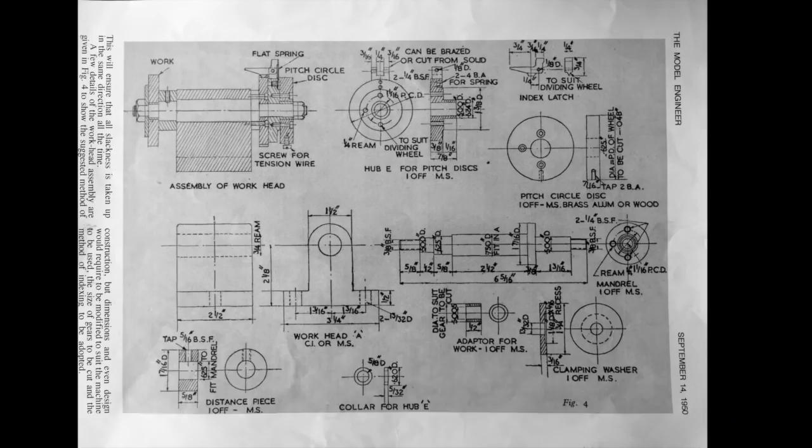After a lot of requests, I have put together this video with all of the various calculations, drawings and design elements of the gear cutting on the Shaper project. Here we see the first component of the mandrel block, parts and materials being sourced, marked up and prepared for the first cut on the Shaper.

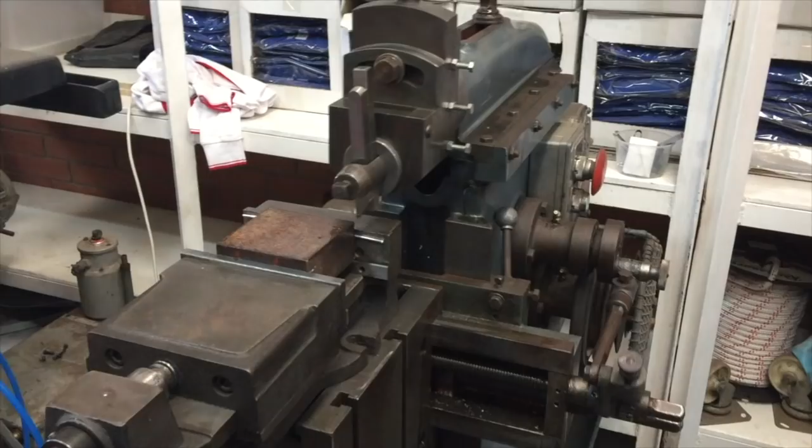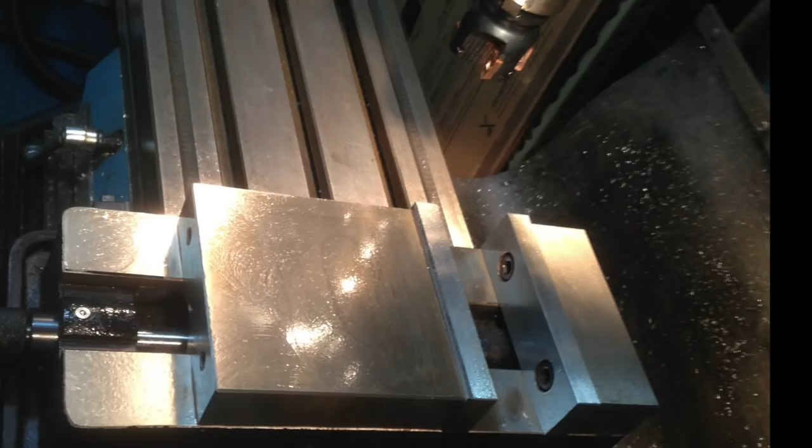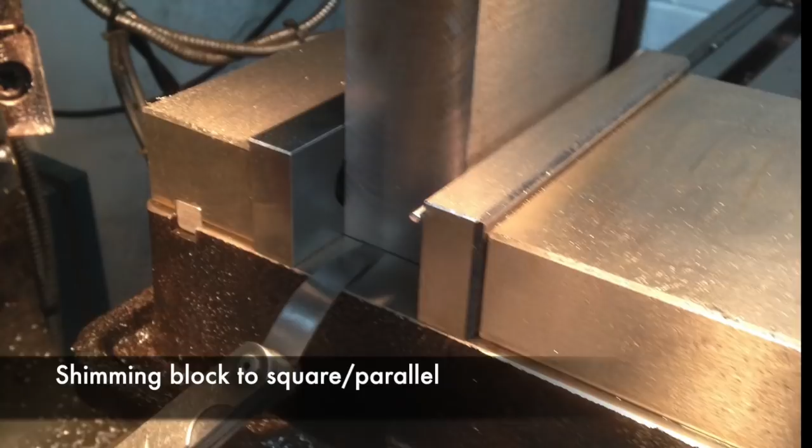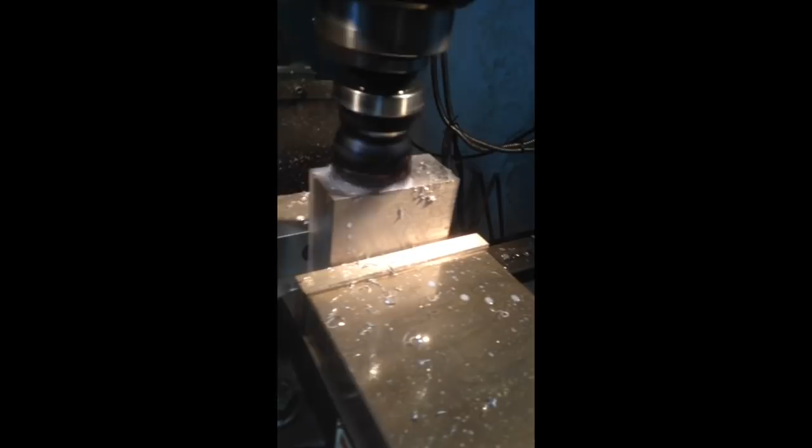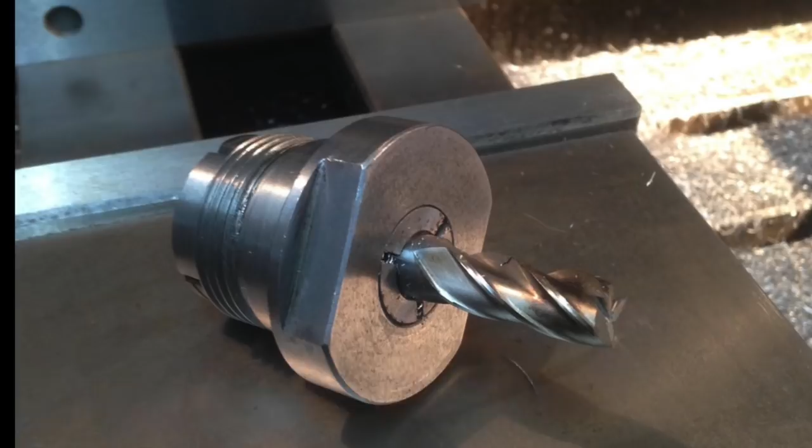Once the block was squared up, we then took it to the mill to do some finishing to size, final bits of squaring off and preparing to bore the hole for the mandrel in this block. The base plate was prepared and squared up using a smaller end mill in the Clarkson collet chuck.

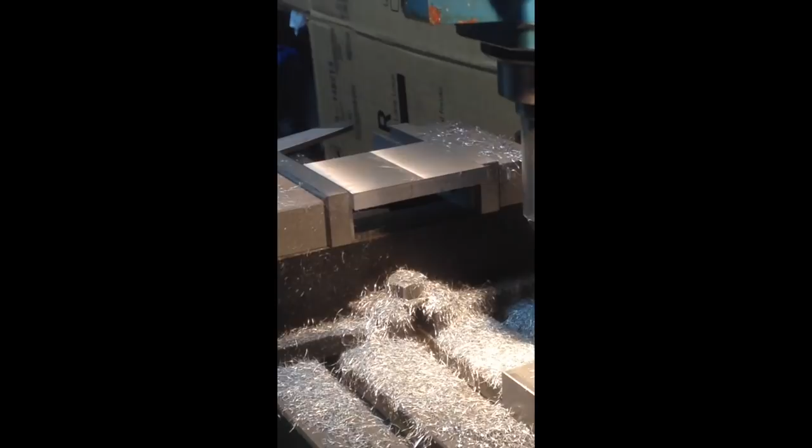Final cut for the last finish. Is it still down to it? I'm just trying to file on that very quickly. File on that. That is that. Okay.

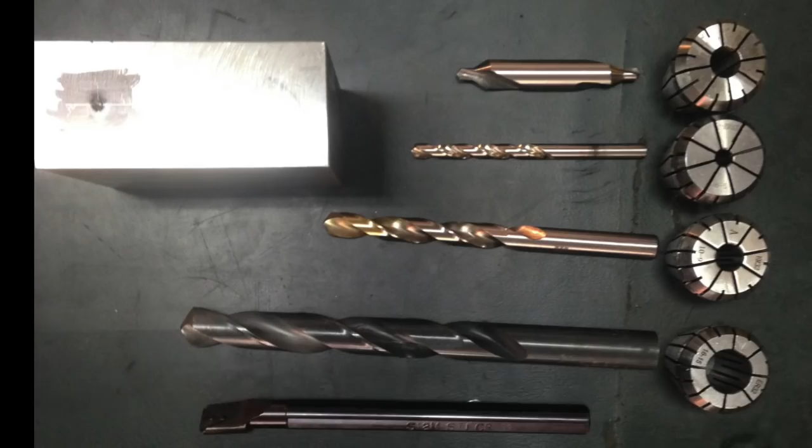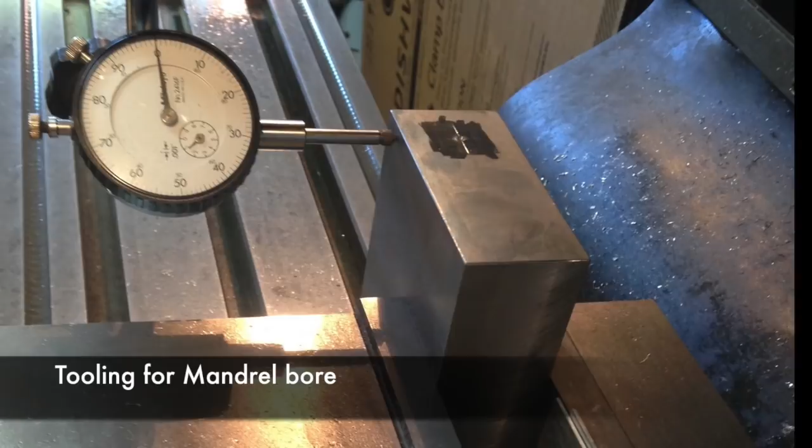What you see here is the solid base and mounting plate, and moving on to the tooling that we prepared to bore the mandrel block. This is used in a number of steps, from smaller drilling through to the larger drilling and the various boring operations to get us to a very tight fit. We want this spindle, the mandrel, to be really held tightly on this block because the shaper has quite a bit of force behind it, hence the need for high precision and good accuracy.

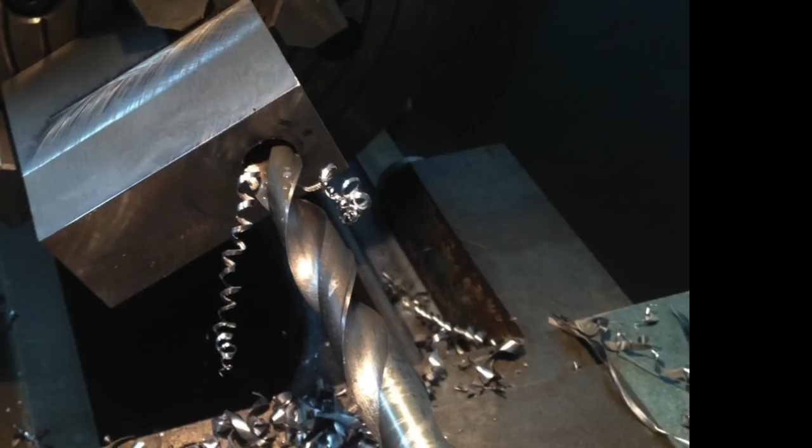Pilot hole is drilled. We now expand to the largest drill size we've got and prepare for boring with the boring bar. Once the boring is finished, we then finish it out with the reamer to an accurate fit.

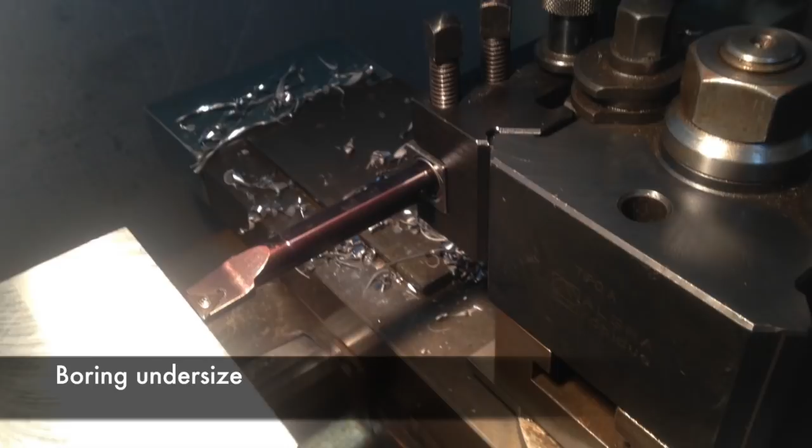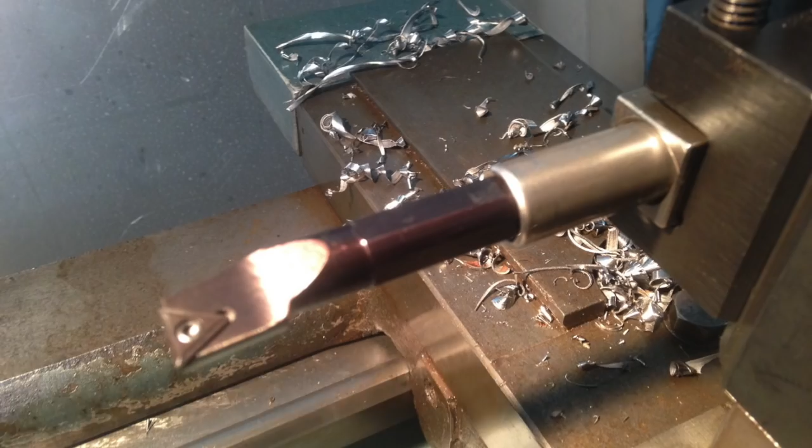Here you can see the extended strongback on the boring tool. This just helps to add some rigidity as we plunge deeper inside the mandrel block.

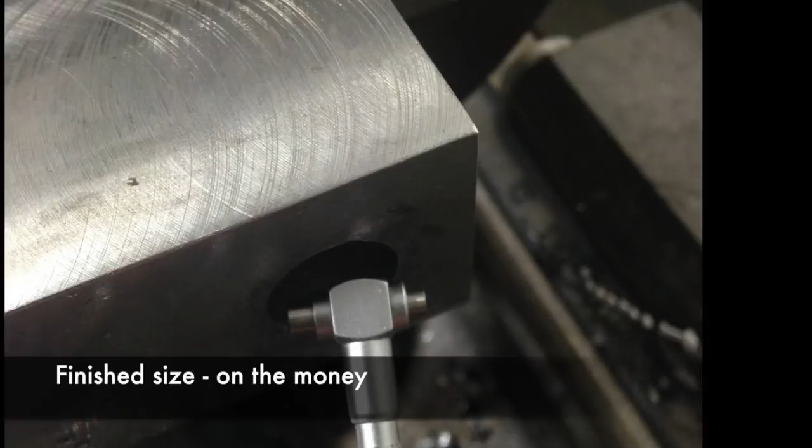Here you can see the reamer being prepared to bring us onto our size for the mandrel. And now we can see by using a bore gauge that we were right on the money with this. So not only are we square and parallel, but the bore is true as well. This is all very important for the performance of the finished tool.

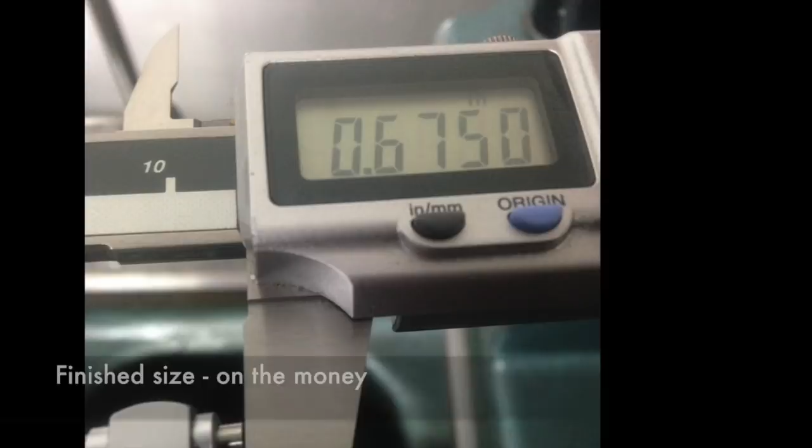Just a quick update. I know I've had a lot of people asking me where this gear cutting attachment for the shaper is. Well, it is in progress. I'm going to show you some photos of the base and the block that have been put together, and we're just now looking at our final dimensions for the main shaft. The gears that we want to cut have a deeper boss than the plan would otherwise allow for, at 1.5 inch, so we're going to increase this slightly to match the gears for the CVA.

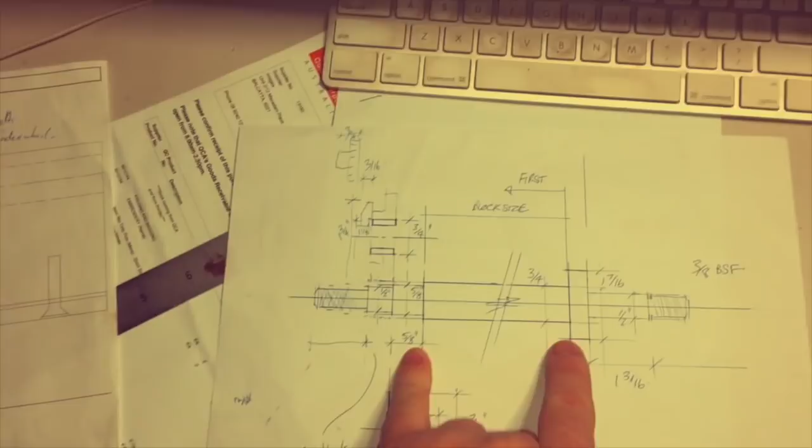We've got dimensions for a collar that sits in to size up the 1/2 inch to the bore of the gear. We've got a locking piece that sits on the end of the shaft to secure the shaft inside the block. We've got the end cap here, which is bolted onto our index wheel.

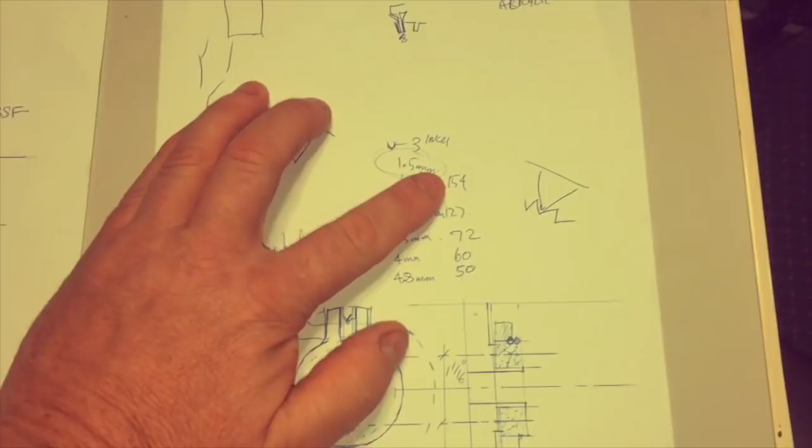Then we have the index tooth arrangement, which locks into the index wheel, and based on the 154 tooth gear that we're trying to do, we're looking at probably trying to make the index wheel about 3 inches in diameter. That gives us a 1.5 mil wide index for the pin on this to lock into.

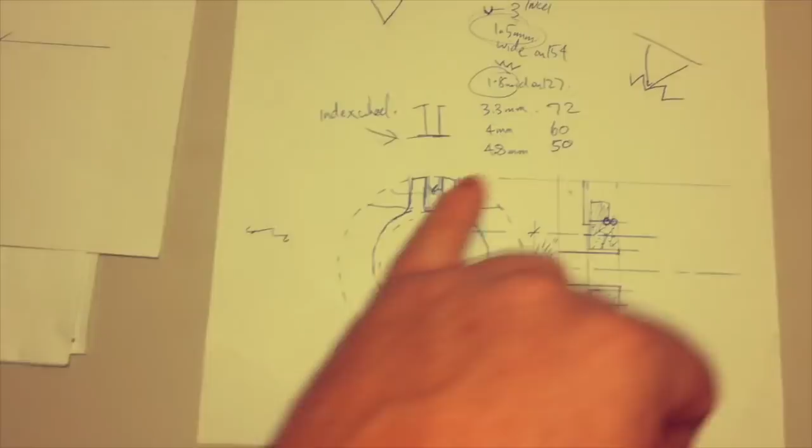So the tooth on the indexing pin is driven by the pitch circle diameter disc. So we figure if we have 1.5 mils on a 3 inch disc, and we were to put a slot of 0.8 mils, which gives us, what's that, 0.7 mil as an actual tooth in between. I'll look probably to laser cut these out of acrylic, possibly, or MDF or plywood, depending.

But that's coming together, so I think our plan of attack here will be to make the bushing for the gear, make the locking collar, turn down this end of the shaft, then come around and finish off the shaft. Do our 2 fixing holes for our index gear that sits over that. Once we've got an index gear that we know is the tooth that we're after, then we can lock in this piece here and be happy with that. And then some pitch circle discs, and we should be right to make some chips.

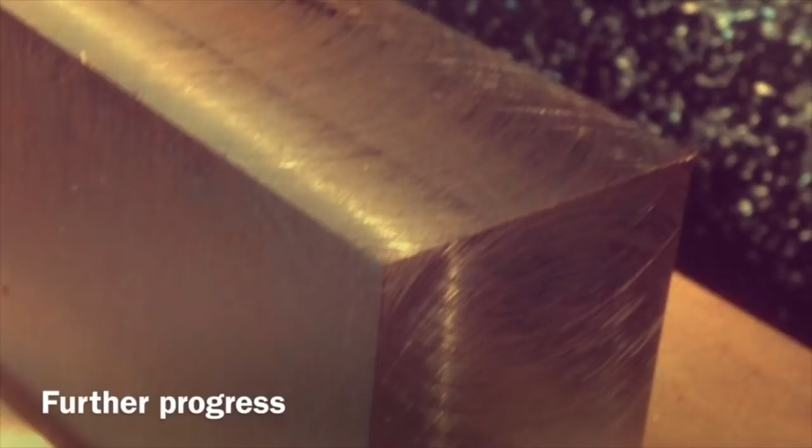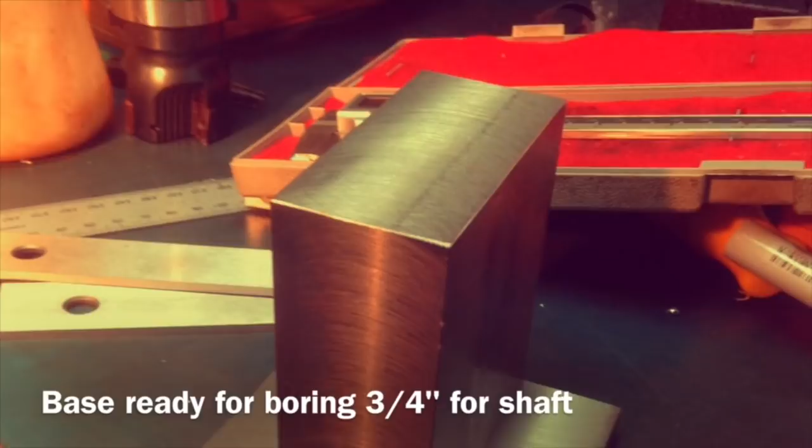Now preparing to thread the end clamp in preparation for final size of all the various components. Threading the nut.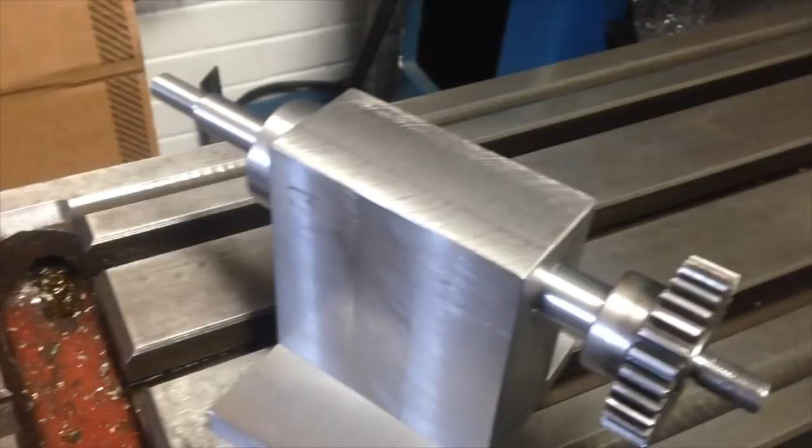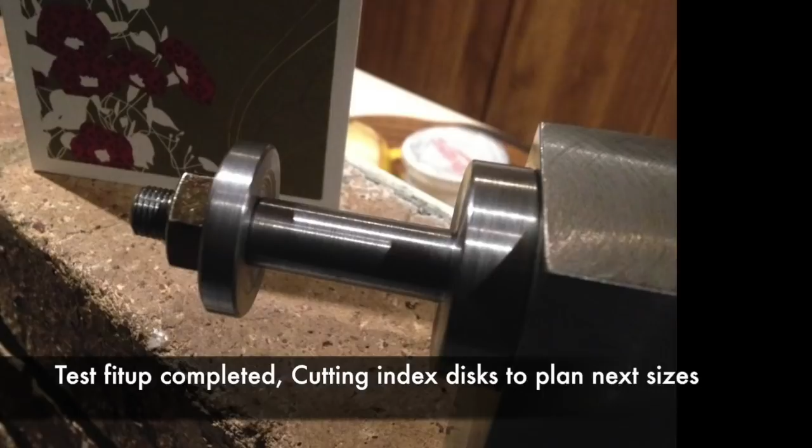Now that the mandrel fits neatly, we need to start working on the indexing arrangement and the pitch circle drive. So far we've been adjusting the plans as we progress to suit as our project approach changes. I threw together some designs on the computer in preparation for laser cutting the plastic components for the pitch circle disc and the index wheel.

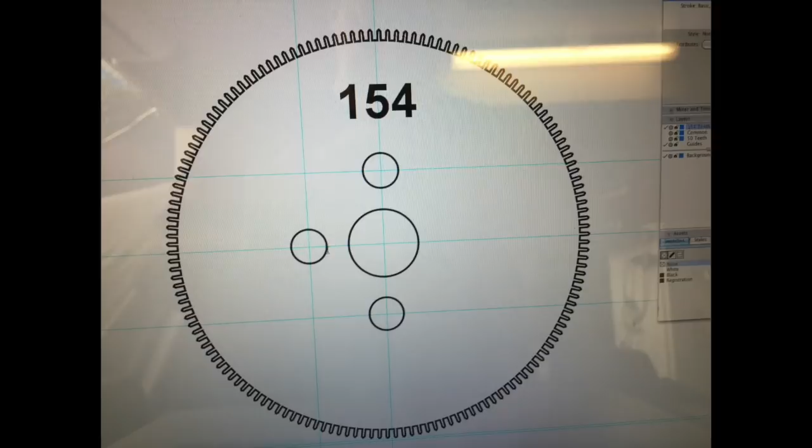This is the plan for the 154-tooth index wheel, and the largest size gear that we expected to cut was the 154 tooth, and so we just worked through what size and what was reasonable in terms of a pin size, a gap size, and essentially dealing with the manufacturability of this particular assembly.

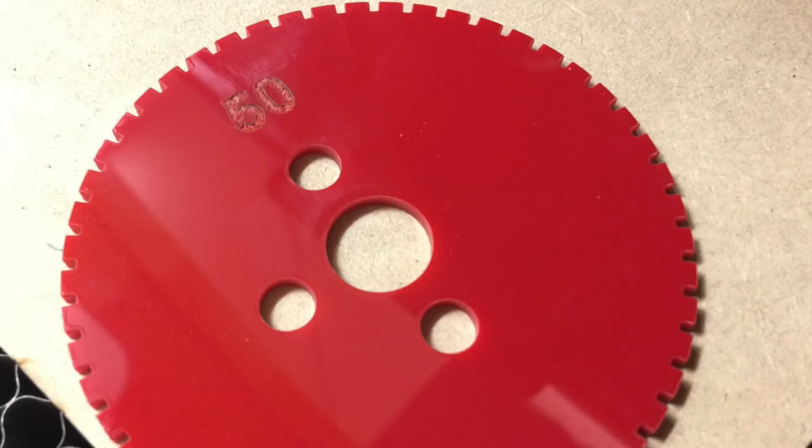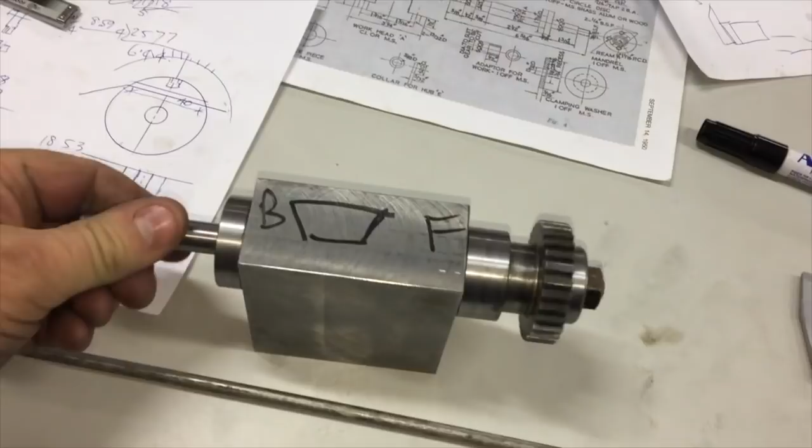Okay, so here's our driven shaft into the pillow block. We've got our locking collar, we've got our spacer for the gear blank. This is the example we're using in place of the gear blank right now. Then our end cap goes on and securing nut. So this all bears down and locks this shaft up to be able to move as one piece.

At this end we load our index discs on. We've got 2 pins to add in here to register the index discs. A set of 3 discs go in.

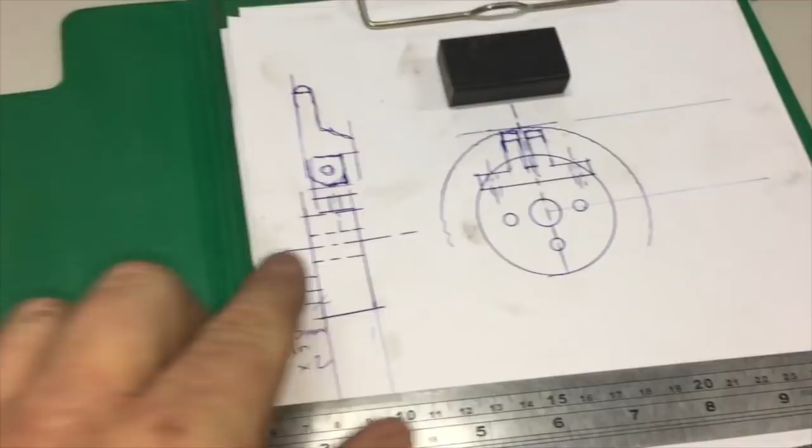We have a piece we're still making up, which is about 18mm thick, a circle with the top cut off. I'm going to use this piece of blanking steel to make our pillow block to bolt into the top of that. Then we'll have our index pawl made up of this stock, which is what will latch into the index pin. So this assembly then slides on next.

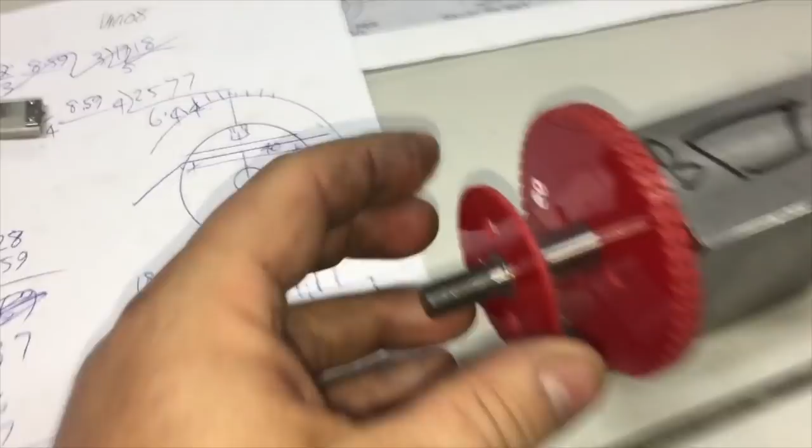After that, with pins out this side, the pitch circle disc goes on. We've got a guide disc, 2 pitch circle discs with a detent hole to secure into the wire, and then the final guide disc. Once that's all assembled, final clamp washer and nut comes on.

So the procedure will be bolt it all up, take a cut. When we want to adjust the index position, we loosen this off, move around to our next tooth position, lock it up again, run the next tooth, and so on and so forth.

This is the material for our dowel pins, that's the material for a pillow block and for the latch. And yeah, drawings, everything ready to go.

So we're definitely approaching some progress. We're looking to fix onto the knee section of the shaper with a couple of uprights. From that we're going to suspend a piece of wire in the back, which I'll show you a bit later on. The wire is wrapped around the pitch circle disc. So as the bed moves across, you can see the cutter will be coming straight through the gear, and the gear rotates on that pitch circle diameter as per the disc in the back.

You cut a tooth, then you reset the index, which rolls the gear around to the next tooth, lock it in, rinse and repeat. So we're just doing a mock-up here to make sure that we've got an overall idea of how we're going to clamp the wire, that we've got the pitch circle disc in place. We know how thick we're going to make our index wheel, which will pin into the index tooth - sorry, the index tooth that will pin into the index wheel.

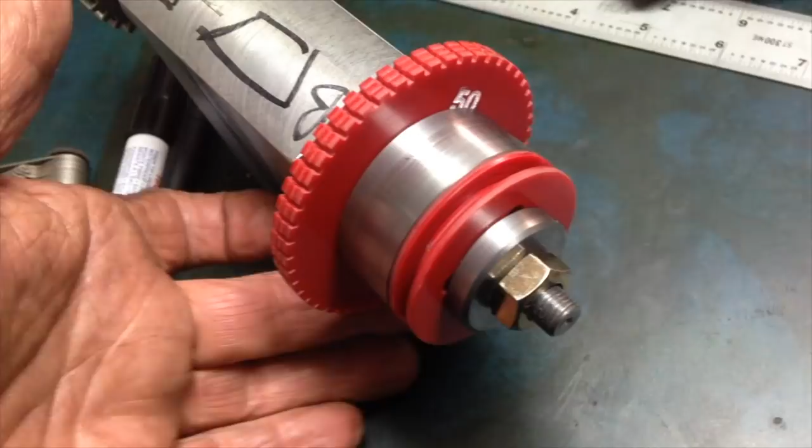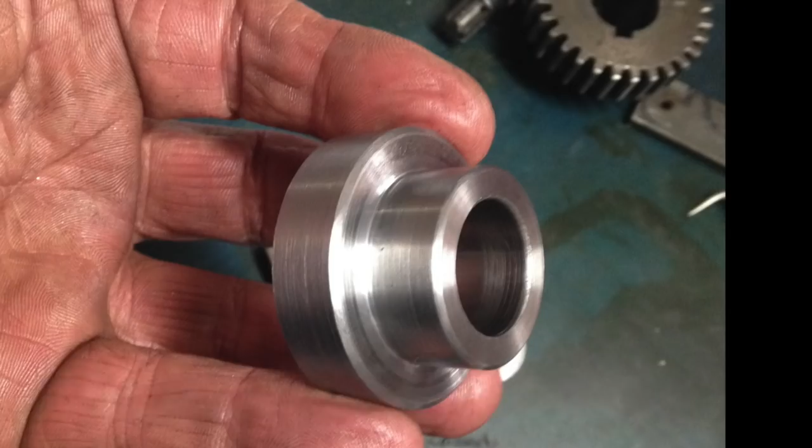Everything's really coming together now. This is the gear blank cut to size for the 50-tooth gear. The calculations for the size of the gear blank are detailed at the end of this video, but here we see it being loaded onto the mandrel and then supported with backing nut and attached to the mandrel spindle for the index teeth.

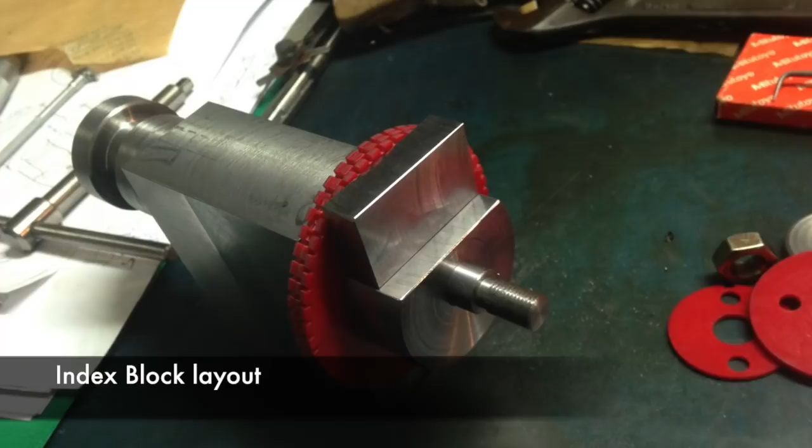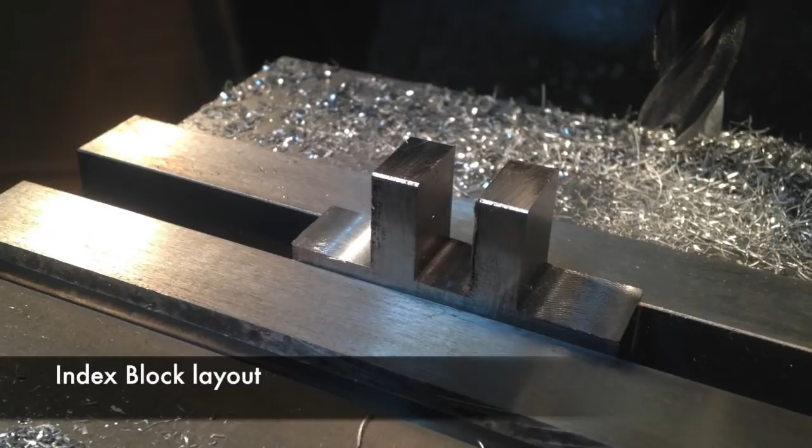Now we start to work on the index block end. We needed a solid mount for the index pin, but we also wanted to be able to adjust the diameter of the pitch circle, or rather the diameter of the index wheels, so that we could cut larger tooth gears. And so with a spacer block of an additional 1 inch boltable in between the pillow block and the drive, we can accommodate larger diameter gears, different diametral pitches and so forth.

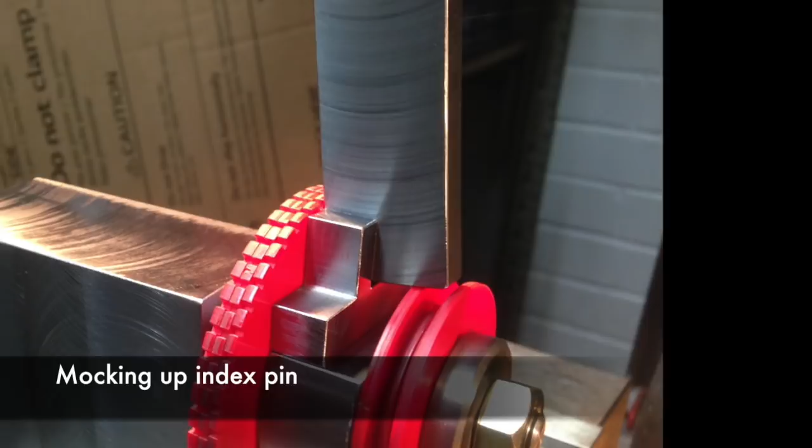Here we're progressing to mock up the index pin. The pillow block is ready, the index drive is ready, and this part here is also a test of the pitch circle drive. So this is the actual component that connects to the index wheel and is rotated as the table moves left and right.

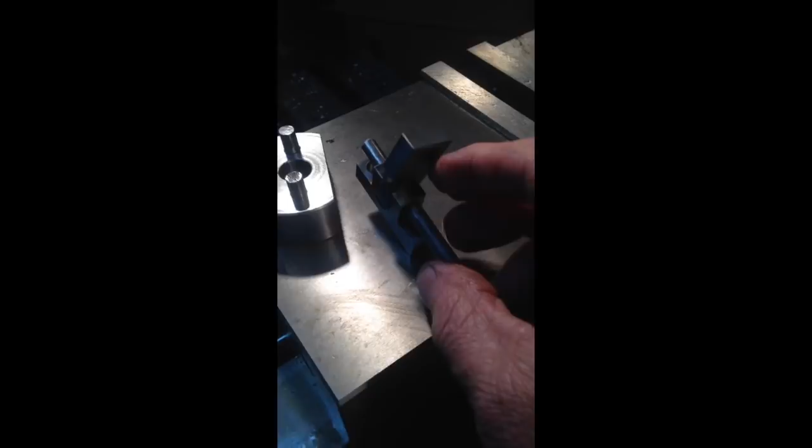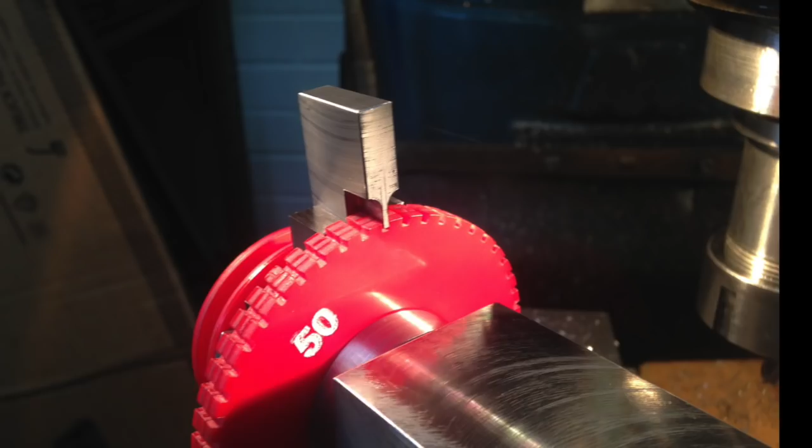After test fitting the index pin and getting a really nice positive result here, we then proceed to dowel the index pin into the pillow block and mount the pillow block onto the index drive.

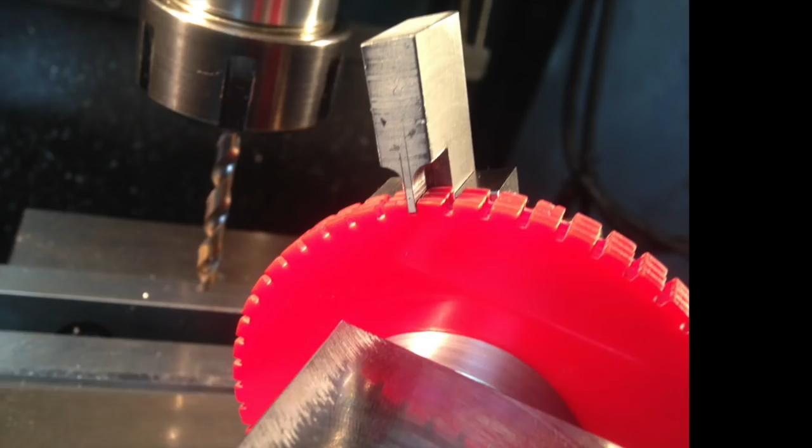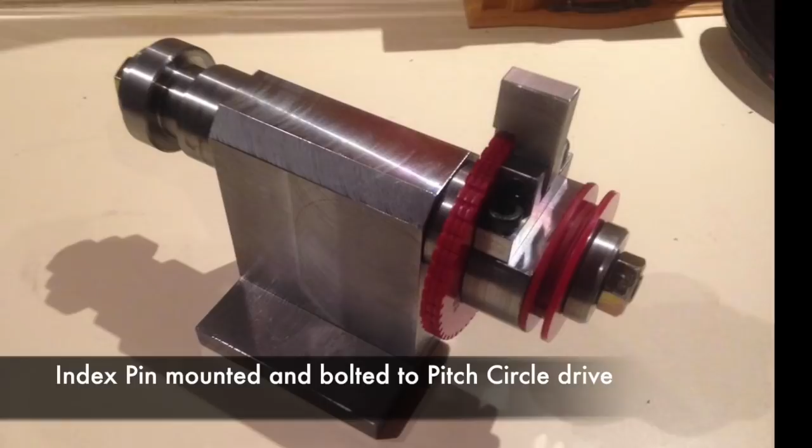And here's the finished assembly. This is basically ready now to start cutting a gear. You can see the actual cutting of the gear in the director's cut, and you can also see our competition entry into Emma Ritson's toolmaking competition videos as well.

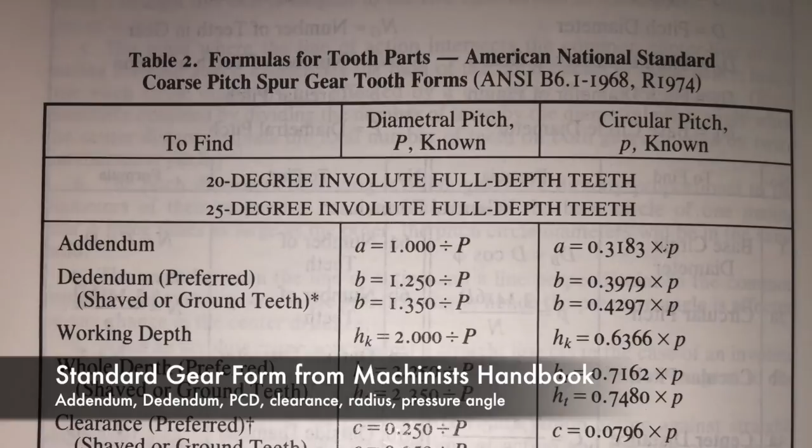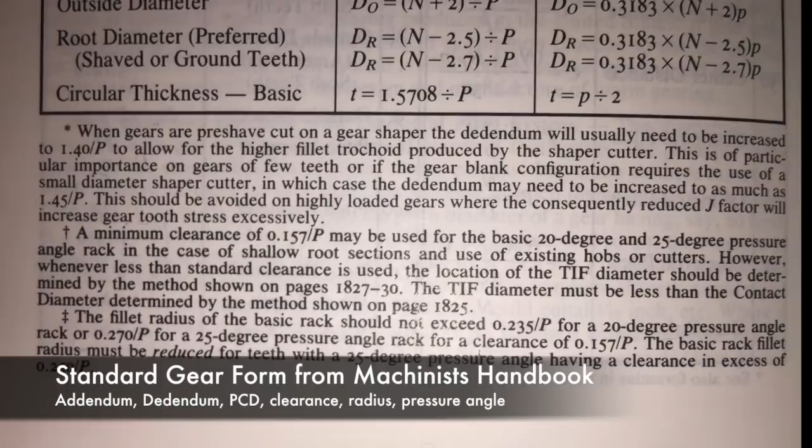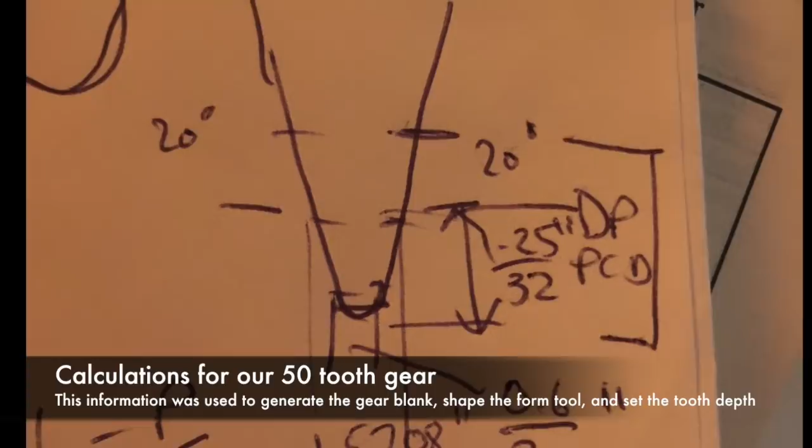Here we start to look at the particular calculations of a specific gear based on a diametral pitch of 32 and based on a tooth count of 50. We've then used these basics from the machinist's handbook and calculated the measurements that we require, both for the blank, the plunging of depth down into the tooth, the 20-degree pressure angle, and basically what we need to manufacture the finished gear.

I hope you've enjoyed this. As I say, it was based on a request that we go into more of the calculations. Thanks for watching.